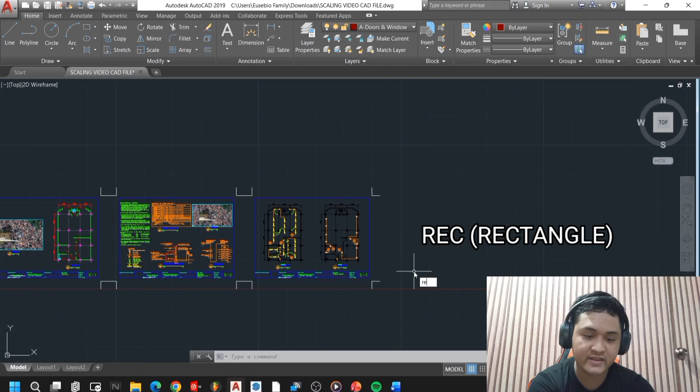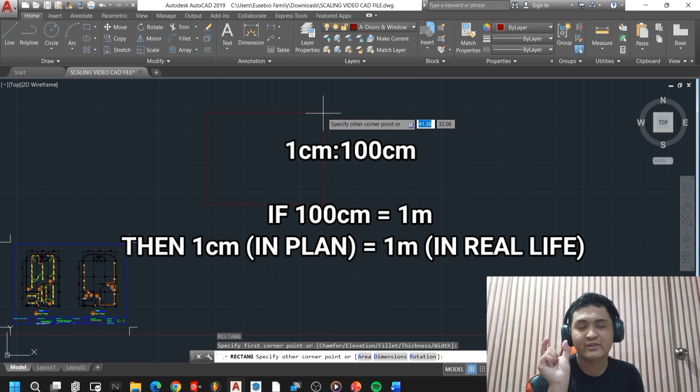We are going to assume lagi dito sa AutoCAD na true centimeters yung ating scale. Kasi we are using 1:100 centimeters. Kapag 1 cm yung nilagay natin sa plano, in real life, it should be 1 meter. Yung centimeter, i-adapt natin dito sa ating AutoCAD.

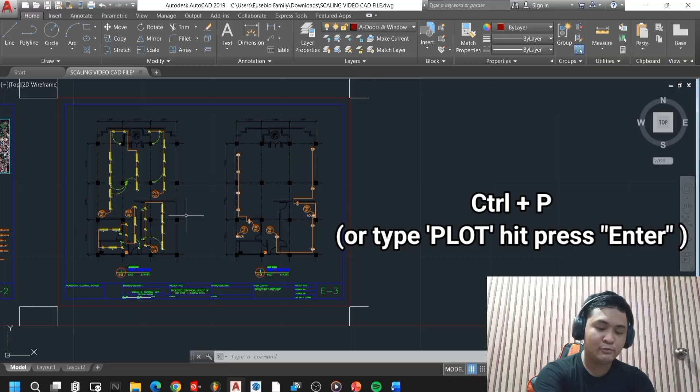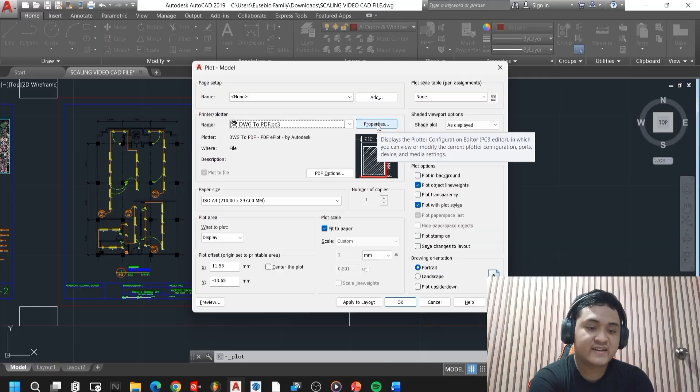I'm going to press Ctrl P or the command is plot dito sa ating AutoCAD and then we are going to add page setup. So, pangalanan ko siya na plot. Okay. So, ang next naman na gagawin natin dito is we are going to export it in DWG to PDF. We can add a property of our paper size. So, properties, may magpa-pop up dito sa atin. We are going to select the user-defined paper sizes and calibration.